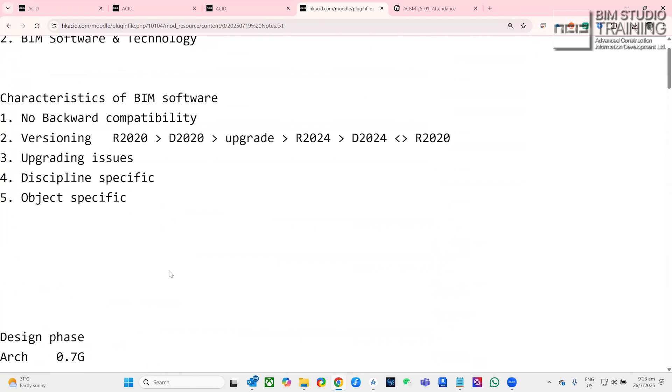So last time we mentioned about the characteristics of the BIM software. Let me just make a copy of this. We haven't finished yet on this part. So we mentioned about BIM software, we do not have the backward compatibilities. We have issues on the versioning, we have the issue on the upgrading issues, and then it is object specific and also discipline specific, right? Now, these are some of the characteristics of the BIM software.

Now we keep on emphasizing the fact that you, as a BIM manager, how you manage the process. When we talk about stakeholders around, a lot of people in a project, in the design phase, in the construction phase, in the operation phase, they all have to use softwares dealing with digital information. So the role of BIM manager is actually to facilitate the whole BIM process. How do you treat the digital information?

How can you ensure the digital information is correct? Done by whom? Has it been checked by someone else? Are the digital information in accordance to the standard that's specified? All right, so that is the role of the BIM manager.

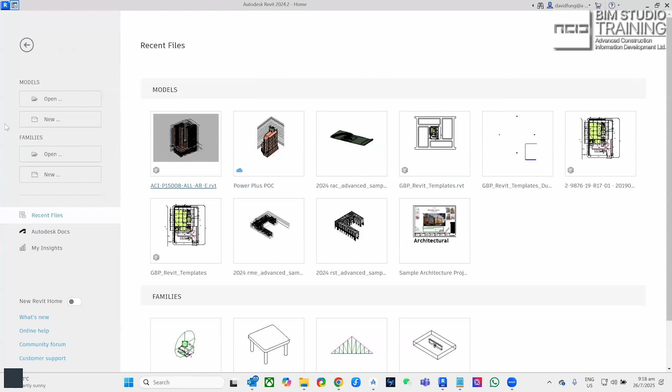Now if you are okay with this, you can open up the file - open triangle. Don't open, open the triangle here, the triangle sample projects. Open up the RAC 2024 RAC advanced sample project. Let's continue looking at this software.

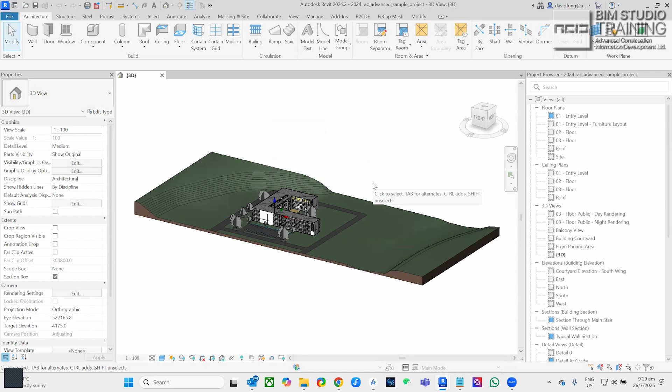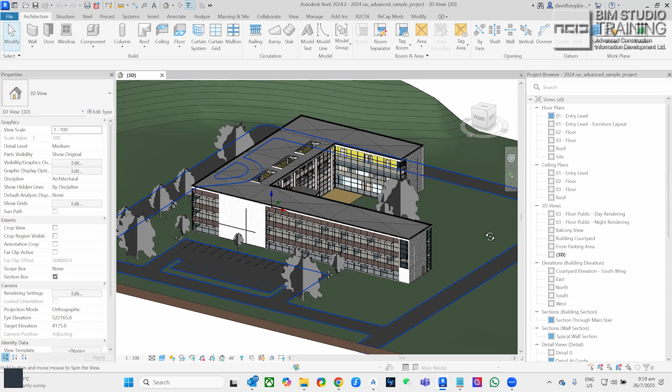All right, you open this file. Now, this is of course an architectural file here. Can you scroll to the bottom? Did I ask you to flip and look at the bottom before? Yeah, you're already right, okay. Now if you look at it, it's a simple building, a simple project in here.

On the right hand side or your left hand side, doesn't matter. Under project browser, now you can see the English names: floor plan, ceiling plan, 3D views, elevation, sections, rendering, drafting view, walkthrough. Walkthrough in Hong Kong we call it animations, all right? Animations.

Area plan - so do you know what is area plan? What's it for? No, it's not only top view. Top view is plan. Room area, you can get it from the floor plan. This is not about room size.

This is for GFA calculation - general for the architects, we calculate the area, not the room size, but all the overall area. All the mathematical calculations is under here, area plans. So the consultant and architects need to use this, not contractor, but architect definitely needs to use this area plan.

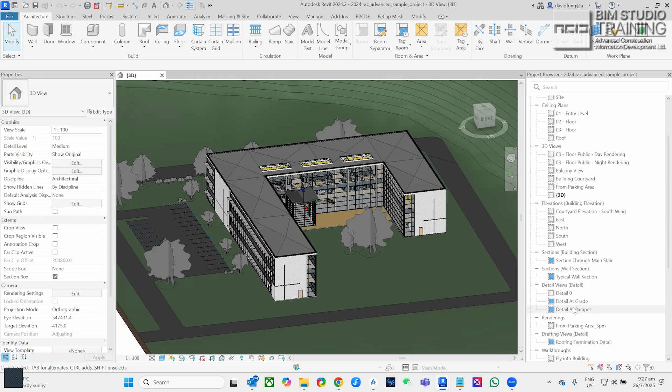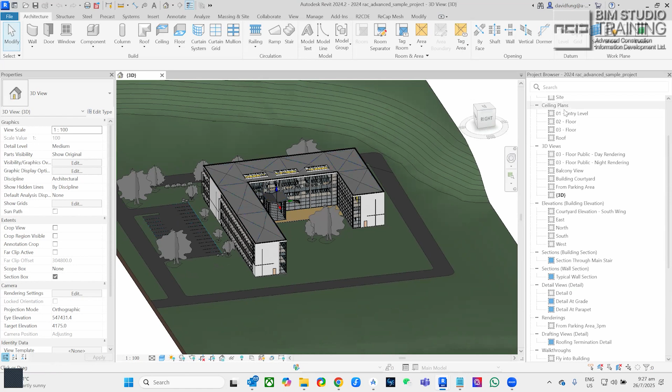Okay, let me explain a little bit more first. Now, this is a 3D view. I would like you to open three views. One is this one here, the second one is the ground floor plan, the third one is the east elevation. Can you open these three?

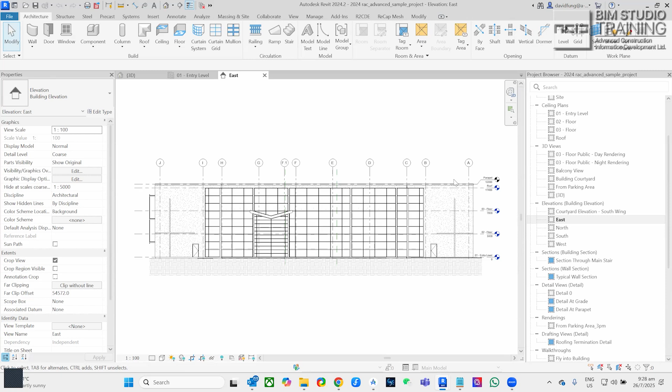If you open these three, and you want to see all at the same time, you want to lay them out on the same screen, just like a tile, kitchen tile. So you make your window as a tile. Window tile, WT. You press the keyboard, WT. So it automatically arranges for you, WT. Now, if you want to go back to any particular view because it's too small, you do the reverse, TW. So WT, TW.

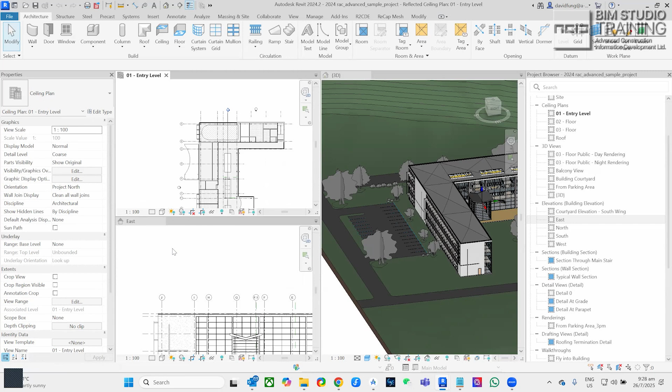Now, if you look at this, in BIM, we look at things from a different perspective. Oh, I opened it wrong, not a ceiling plan, should be floor plan. Floor plan, okay.

Now, I tell you a story. I started my BIM journey in 1998, when I was working in Australia. I'm using BIM there, not Revit, but another software. Do you know that during those days working in Australia, I needed to sign a special paper with the company, a special agreement. Why? The statement says...

It is David's own intention, his own decision to set his monitor to this size, I mean subdivided into small things. Should anything happen to David's eyesight, it is his own problem, it's not because the company asked him to do so.

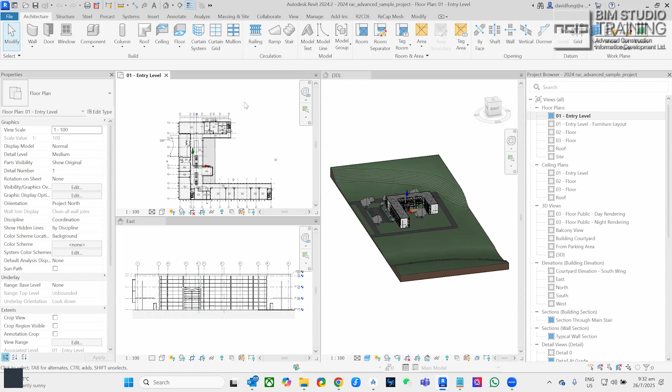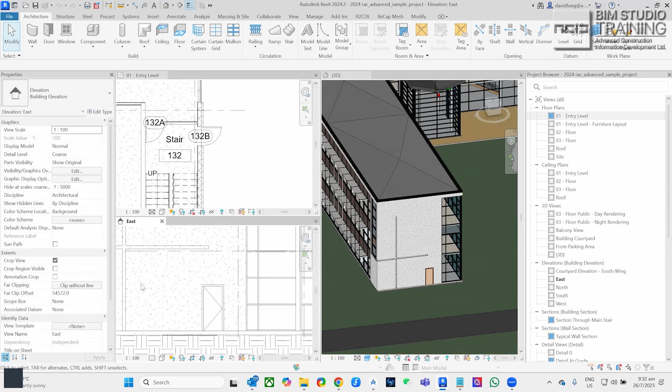Now, having said that, I would like you to go to the floor plan. I want you to zoom in on the floor plan, there's a door here. By the same token, if you zoom in here, and on the east elevation, zoom in here. Now you are looking at a door at this wing, and then this is the door, this is the door.

Now, if I'm talking from a designer or a contractor's point of view, if these drawings were prepared by CAD, for example, does it mean this is one CAD file, this is another CAD file, this is another CAD file? We do change things. Architect, designer, we change design every day. Contractor may change as well.

So if this is in CAD, and I change the position of the door, if I shift it here, what do I need to change? Change it 1, 2, 3 times, plus maybe the door schedule 4 times. So we are doing it 4 times, same thing 4 times. That's why we are the most unproductive industry in the world, because we keep doing the same thing many times.

Now if you do that in the BIM software, if you highlight this door, for example, and I move this door, now the door becomes an arrow. If I move the door to this position, try to do that, and tell me what happened.

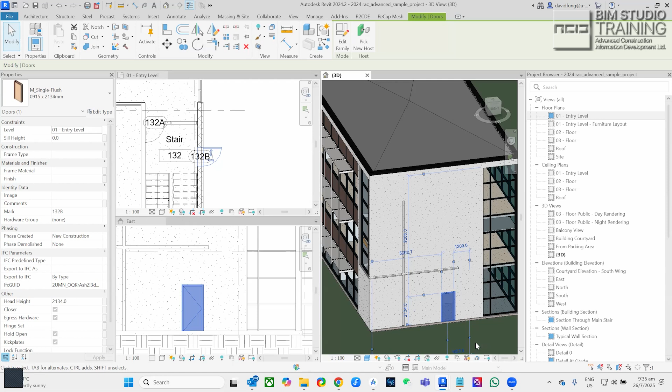So we draw and draw. I cannot imagine why people are still using CAD, then they keep doing the same thing many times. We keep changing, and they have to redo everything again. So we have a name for it - this is called single source of truth, SSOT.

So this is a characteristic of BIM software: it is a single source of truth. I'm not sure whether you've heard about this, but basically all the government people now are very much into this idea. It needs to be a single source. So the plan, the section, the elevation, the schedule - you change it anywhere, and it changes everywhere. We call it single source of truth.

In fact, this is not a word that I created. If you look at the technical circular, you see that? So BIM can be served as single source of truth. There will be only one single source - one for design, then pass one during construction, and then later for the operation. So this is one model, and the model is a single source of truth. Now, this is a keyword. You may be asked, what is the characteristic of BIM? So one of the typical answers is a single source of truth, because we put everything in that model.

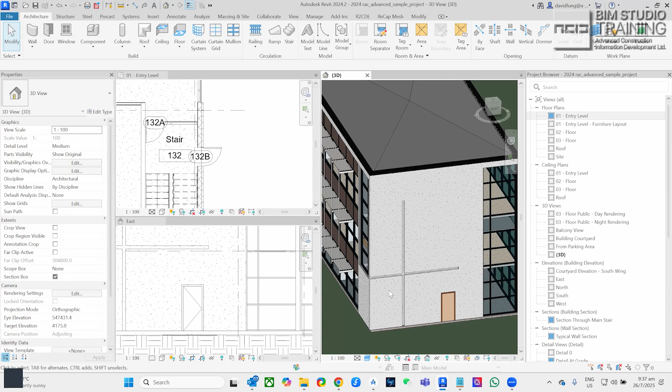Now, it does have a lot of implications. That means we have different groups of people - a group of designers, a group of contractors and subcontractors. So that means every single body works on their own discipline. Architect works on their own discipline, structural engineer on their own discipline, contractor, MEP or plastering or steelwork. So they produce their own discipline model, and that is their single source of truth. Now, when everybody puts them in, they combine them into a consolidated model.

Now, if you look at this, this is the model, and because it's a single source of truth, what is a plan? A plan is a horizontal cut of the model, looking down. What is a ceiling plan? It's a horizontal cut of the model, looking up. What is a section? A vertical cut. What is an elevation? A vertical cut of the model, but not cutting the model - that's the elevation. What's the 3D? 3D is this one here.

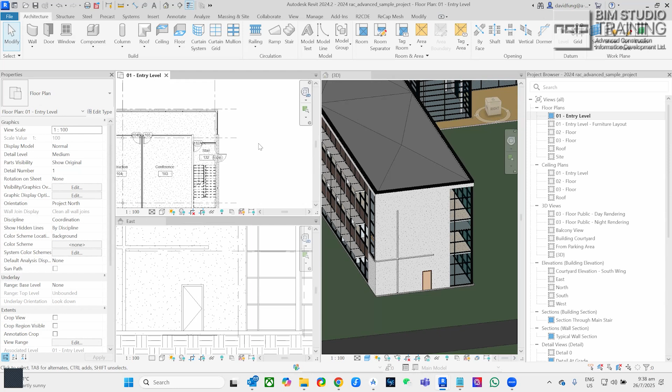So basically what it means is every single view comes from the model. So we are creating a relationship - it is from model to view. So views means the plan view, section, elevation views, section views. I'll come to schedule later. So these are the views.

We do not draw anymore. I told you, as an architect, I haven't used AutoCAD for the last 24 years. I do not need to use AutoCAD for the last 24 years. But it doesn't mean I do not have drawings - it only means the drawing has to be produced from the BIM. So plan, elevation, section. Think about this - there will be no CAD people anymore. Is there any CAD people here? Imagine there will be no CAD people anymore in your company, in the industry, in your project. There will only be someone who builds a model, and then the model will be cut into different views.

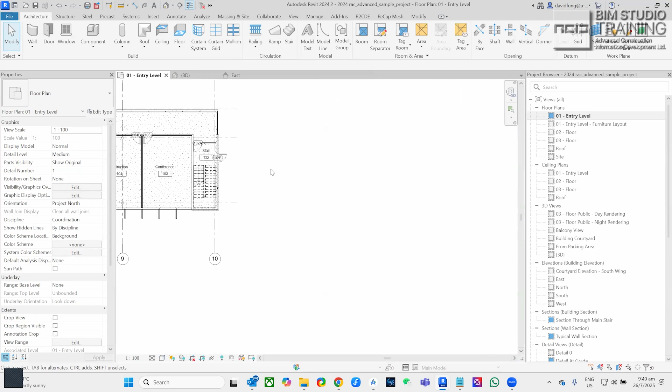Now, are these drawings? Are these drawings? Let's take a look. Say, for example, if I go back to floor plan, just a few clicks - now can you tell me, if I want to cut a section through here using CAD, how long will that take a draftsman to cut me a section through 3 stories? How long will that take? 2 hours? 1 hour, can you? 1 hour cannot - 2 hours already very few. Normally I think it may take 3 hours, maybe half a day. Okay, something like that. If someone tells you it takes 2 days, you can fire him, right?

Now if I want to cut a section through here using a BIM software, as I said, because we already have a model, this is a horizontal cut of the model. You can go to the icon next to the house - there's a section mark here. You click on the section mark, and here, detailed section - we don't want detailed section, we want building sections. Go to floor plan, go to section mark, and select the building section. Now the building section - one click here, and another click there. All right, 2 clicks, and then you create a section mark with a line in between. So this is the same as your CAD operation - just draw where you want to have the section. Now in CAD, the draftsman will need to spend 2-3 hours to draw this up. But now you are the one creating the section. Once you create this, right click, and go to view.

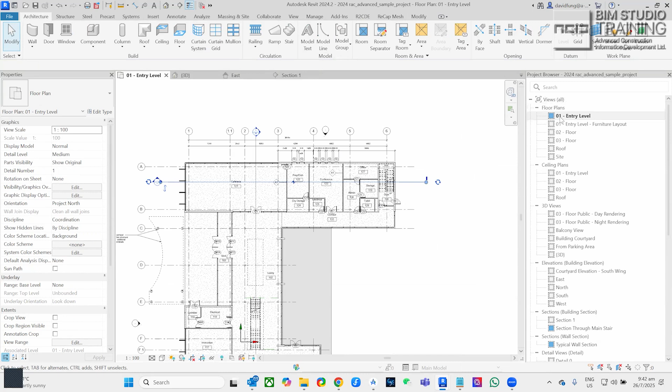Click the command, but make sure you use the building section. If not, click here to see the building section. Then start and end, just like drawing in CAD, just a symbol. After you've drawn the symbol, right click, go to view, and it already has the section.

How much time? One second. Five seconds, right? So you can do 1,000 sections, easy. I never draw anymore. Using CAD is a waste of time.

It will take longer upfront, yes definitely. But this is not building a model, this is part of design. It's a design decision. So it integrates, there's no drafting. It is design and production of drawing at the same time. Yes, it takes longer upfront, but the rest, you do not need to go again.

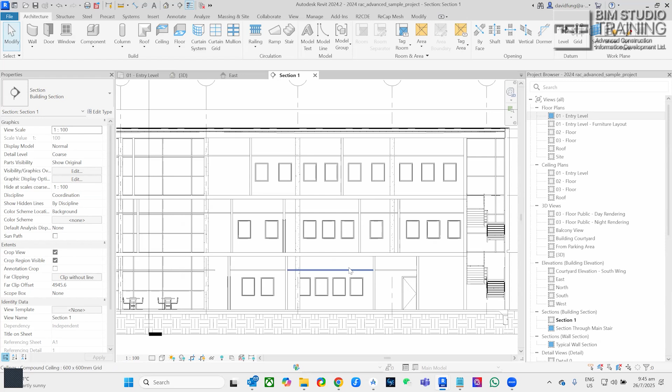It is a model, but we want to draw - I want a drawing of the section, right? Okay, this is not a drawing yet. What is missing? No title block, yes, and this is only graphics, a lot of annotation, dimension, that kind of thing, right? So the draftsman needs to find out what is this room, what is it called, what's the level, what's the door mark, window mark, that kind of annotation. So that's why he needs 2-3 hours to complete this.

Now this is only graphics. Go to annotate. If you want to add some annotation there, you can see there's a command called text, right? See this? Never use it.

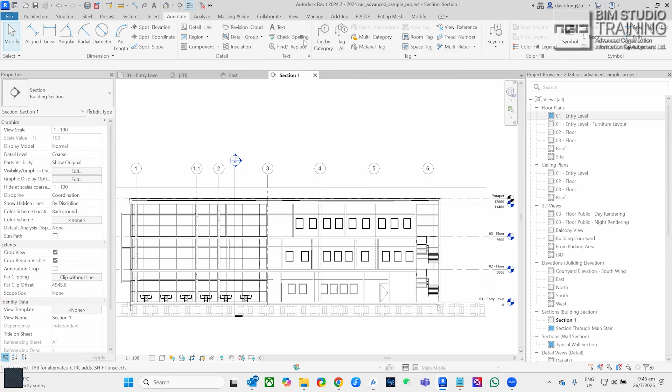Because in CAD, the text has no meaning. Don't use it, we are doing BIM. We are doing information, we are not making text. Never use text, so we are not talking about text. We are using TAG. Tag is information. So I want to tag all.

Tag all, okay, what information do I need? I want the room tag, the door tag, the room tag, the wall tag, the window tag. The room tag here, I want the room tag with area. Now these are information, these are not text. So I wanted the room tag with area, all right, see like that?

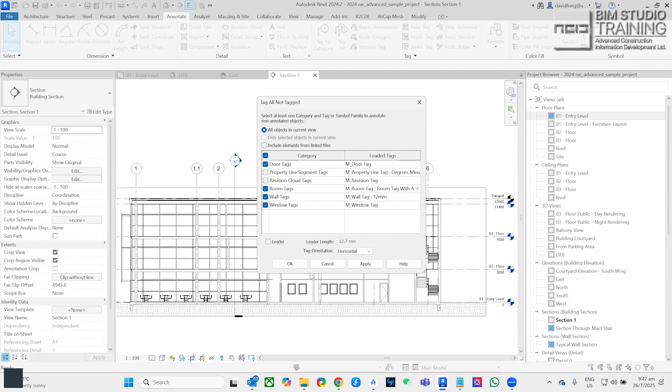I want the information on the door, the information on the room, information on the wall, information on the window. Okay, and how long did it take? Done. Why spend time in CAD to draw it? And you won't get it wrong. Well, hang on, as an architect, is it really that case? Cannot be that, 15, right?

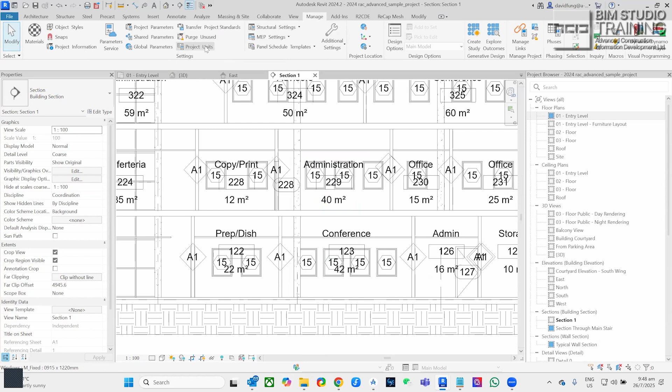Because this one has not been set up properly. Now you only need to set up properly once. So you manage its project unit. So the unit is not right at the moment. I manage the project unit because the area - you see there's no decimal. You click on this. In Hong Kong, we use 3 decimals for the area. So now it's set with 0, so 3 decimal places for the whole project. Okay, and it's done.

You don't need to measure. How do you automate this so they overlap in Revit? You cannot, but you can go to the shopping cart and buy a $10 plugin. Someone else can do it automatically. Yes, you can - it's time, it's money. App Store, you click on this, this is the App Store, Revit App Store.

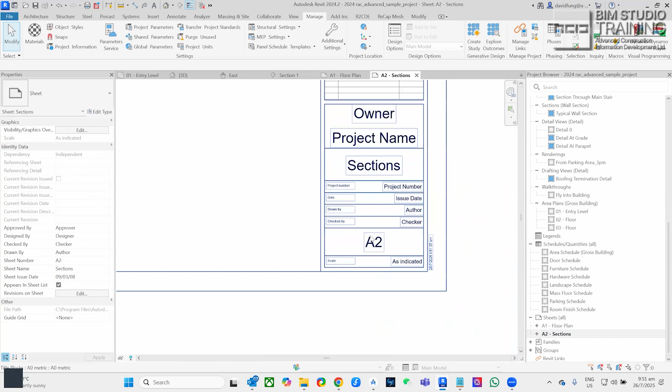Now, I guess your drawing name will not be like this, right? If I double click on this, say this is project 1, 2, 3, 4. This is architect, this is tender drawings, this is plan on plan, 2, 3, 4 slash 023 - a very long thing. Say something like this, doesn't matter the system.

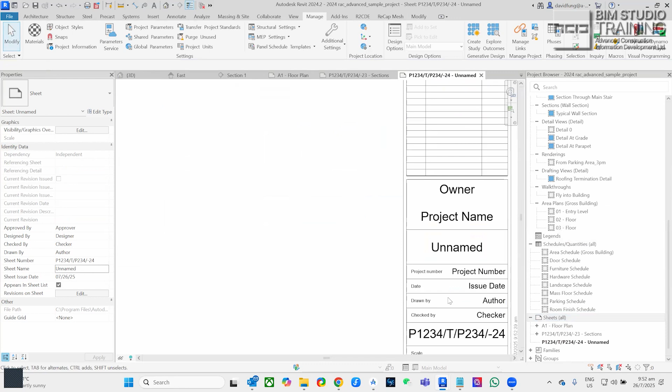All right, say I got this, which is a section on this one here. Now I just created a new section. I want to create a new sheet to put in there. So in the sheet here, right click, new sheets, create a new sheet - A1 - and you see there, it's 24.

So it's all automatic. You mean if you insert a new text, the text inside the form automatically updates, right? Yes, the numbering - automatic. So it was 23, now it becomes 24. If I keep on increasing, 25, 26.

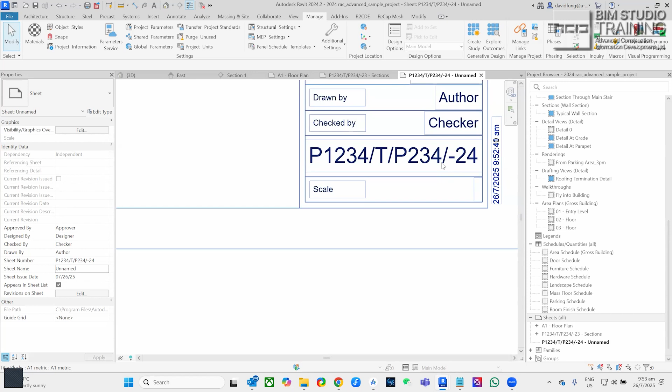All right, it's empty. Now the one I just created is here under section. Under section I created, I called it section 1. Now this is section 1, right? This is something I just created.

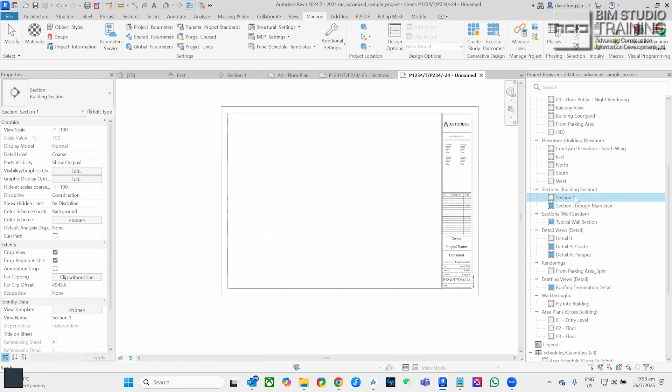All right, now on the new sheet - this is the one I created. So what do I need to do? Drag and drop.

And this is drawing - I do not draw anything. As an architect, I don't draw. I want to design, I want to have a better design - that's all it is, I don't want to draw. And you don't need to draw. I don't understand why all these architectural firms in Hong Kong keep using CAD and draw and draw and draw - just a waste of time. Okay, we don't draw.

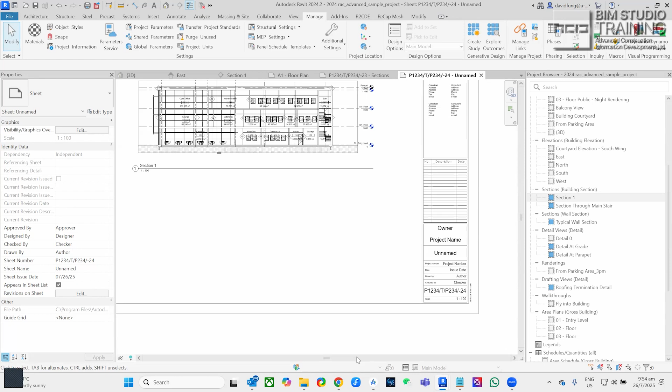So this is the way we create sheets. Now that's why from model, we create the views and it creates sheets. Remember the policy - we said all plans are now mandatory to be generated from the model to the sheet. So the policy is mandatory, now all drawings must come from the model. So now you can see the characteristic of the BIM software - we can generate sheets.

Now this is the proper way of doing things. As a BIM manager, you have to ensure that happens. Now especially, okay, to be frank, I know your company - I've worked with the company. I know your company is somewhat this way.

I have to say, I don't agree with the way you guys work. So you have somebody build a model, you export it as CAD and use CAD to issue drawings. To me, it's wrong. You're not using CAD, you're not using BIM for the whole process - you're just doing the model. That means any further changes, you have to go back again. I personally do not agree with the workflow of the company.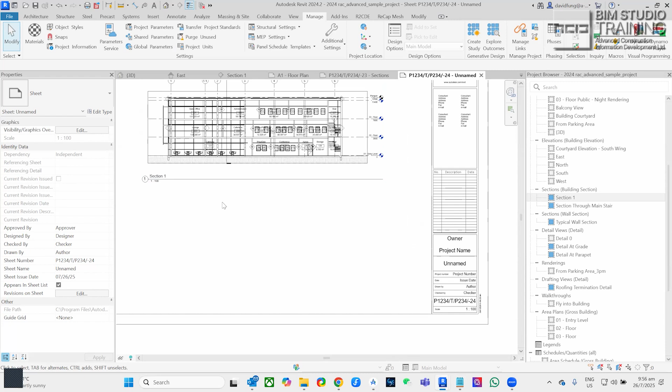I cut this section, right? Where is this section cut from? From plan - this plan, right? Look, this plan, right? I cut this section, correct? Cut from here. So in this sheet, what happened here?

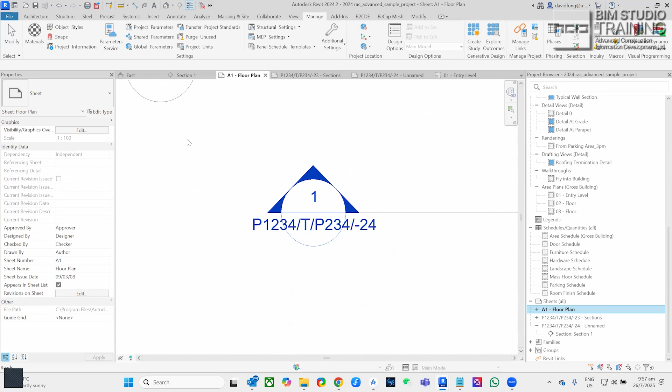It is automatic. Why would we spend time to check it? I never check, I don't need to check. If you're doing CAD, then you have to check again - it's a waste of time. In plan, the section is already updated, in here. So all these, they're correlated - they're all related. No drafting, you don't need a draft.

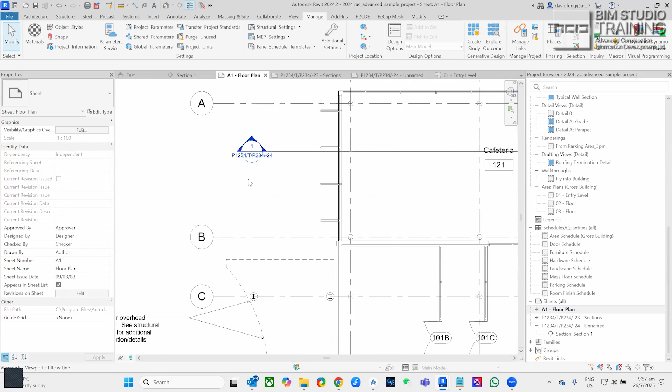So it is information, they're related information. Now the thing is, as I said, we keep on changing things. Now if I look at the floor plan again, let me ask the architectural background.

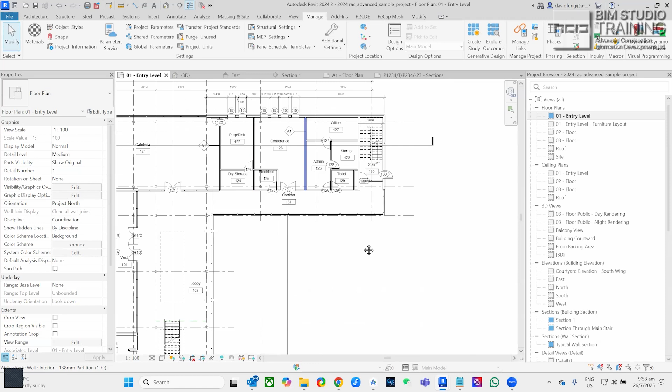By the way, you can do this with me as well. Now, this number, drawing room name, room number, what are the areas of each? Can you click one of them, right click, and select all?

Select all. In the entire project, you select all of them, all become blue. And then all of them must come with area.

Do you guys know? Architects will know. How do architects do the area? Polyline, use polyline, measure it, then get a text and type in the area. Then when you change, you have to go again and change again. Waste of time. We are doing the most unproductive industry in the world.

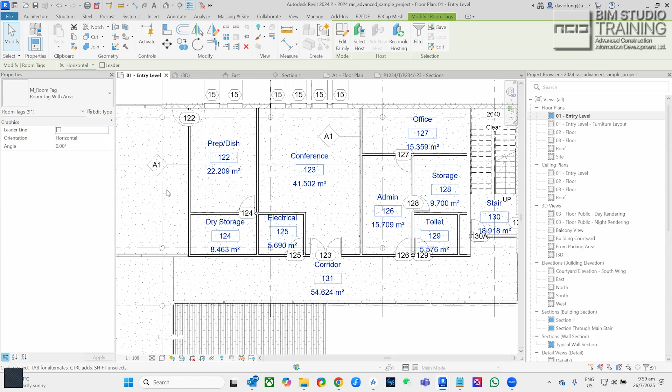This has been around for 30 years, all automatic. We don't change, we don't need to do it for the last 30, 40 years. But how come architects are stupid enough to keep on doing this stupid thing?

Now the thing is, we keep on changing, right? Now this is a cafeteria here, a preparation room here, a dry store here. So they have the area. What happens if I have a design change? I move the wall, change it here. What will change? This area will change, this area will change, that will change.

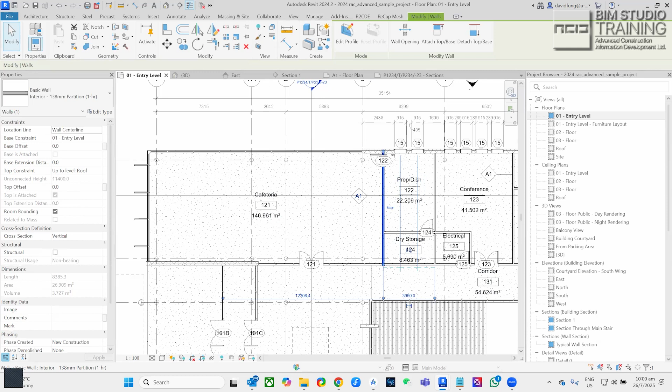So in AutoCAD, you have to repetitively do the changes many times. Now, I select this wall, change the design, left, left, left, left, left. You see, look at the figures? It changes automatically. This is BIM.

Now, if I change this automatically, what happens to my section? So this is 135, right? This 135. So you go to my section. It's 135.

So it doesn't matter where you do it, it is the same model everywhere. So plan, section, elevation, any view, they're not separate. You do not need to recreate everything again. You just have the model and you have everything. So this is SSOT. The key of BIM is SSOT, single source of truth.

Why do you have a model now? You have CAD too. It is even more stupid than only having CAD. Why? Are you doubling up your work? Previously you have CAD. Now you have CAD, and you have BIM. Is it double up? Is it double up?

No, you're tripling. You're doing CAD, you're doing BIM, and you have to ensure they synchronize, they keep on updating. You're tripling your effort. It's the most stupid workflow.

All right, you better not use BIM then. If you're using BIM, the drawing production is part of the process. You're not using BIM as a model, doing CAD, and then coordinating again. It's most stupid.

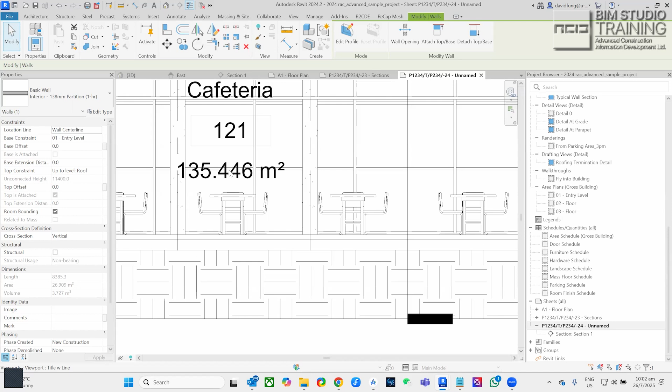So the drawing should come from BIM, not from CAD. All right, so all of these changes are automatic. Okay, so very quickly, I don't want to spend too much time on these technical stuff. Now, I ask you because I know you're an architect.

So this drawing here, are you happy with this? No. Okay, I want to color it, make it color, make it easier to see. So how do we make a color? If this is AutoCAD, how do we do it? In AutoCAD, you make a polyline around the walls, and then you make a hatch and you change the color.

Right? Okay, now you have a design change. Then you go back to the polyline and change the color again. All right, this kind of thing.

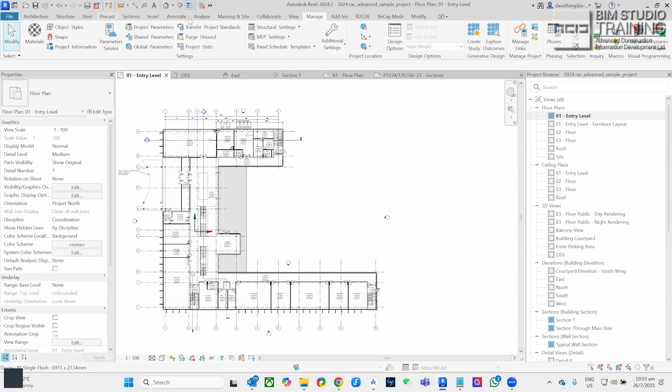Okay, now I'm using annotate. I want to color fill it. Color fill with legend, so I want a color legend. So I put it here.

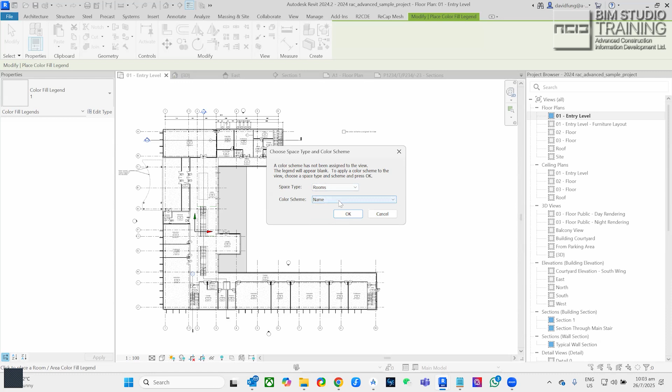Information. What information? What if, and if, then. If it is a room, if this is a storeroom, then it is this color. If this is a classroom, then it is that color. If then, based on information. So based on room name, if a room has a certain name, then it gets a certain color.

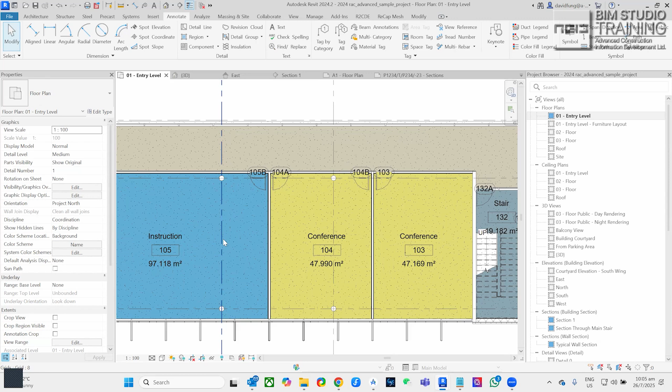Now, okay, the thing is, I keep on changing, right? As I said. So, okay, let me do this. If I put it this way, WT. Okay, I have my plan, I have my section. This section is not color, but the same thing.

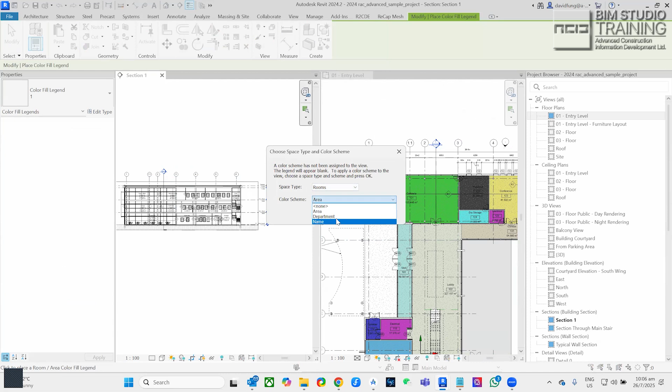Annotate, color fill legend in here. Based on information, if a certain room, then a certain color. Okay, it's automatic, and it's tally.

I keep on changing my design. Change my design, I move my wall. Look at the color. Isn't it should be like this? It should be like this, right? I change the design. That's smaller, that's smaller, that bigger, that bigger. That color changes automatically.

SSOT, single source of truth. All right, so that's a characteristic of BIM software, single source of truth. You work on a model, then you change it everywhere.

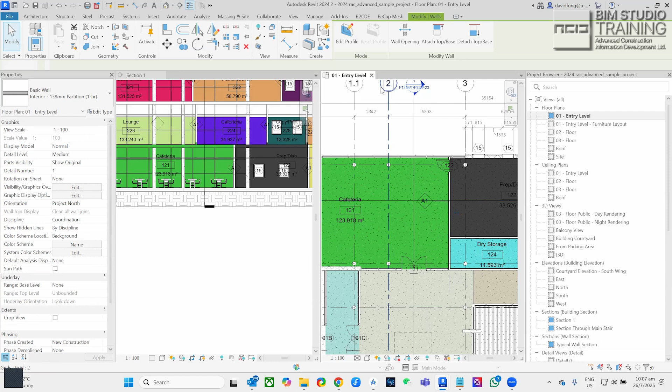We don't mix it with BIM and CAD. No need, and it still wastes more time. Does it make sense to you? Not quite, not quite.

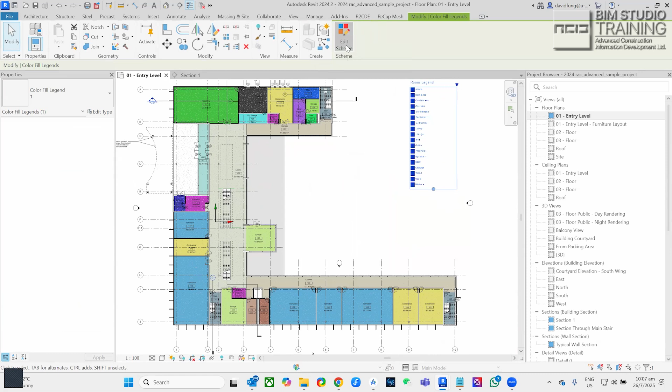If I have every room different name, different color, it is close to meaningless. What about this one? I edit color scheme, so it is every single name a different color. I don't like that. How about based on the area? If this area, this color, this area, this color, and I click OK, that is more meaningful.

A different color scheme, it's a range. You can make up your own rules. So the way it's presented is just a result of rules. The rules are based on information. So room name is information, area is information.

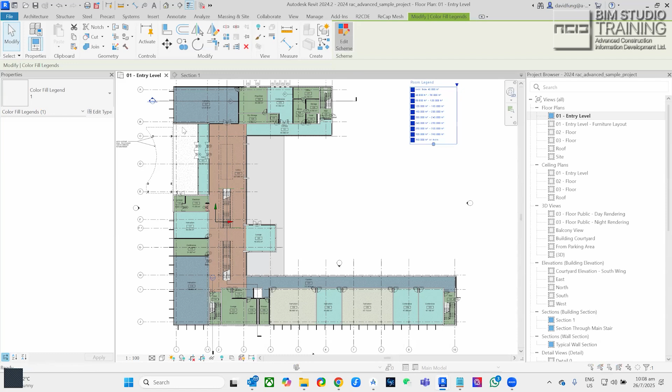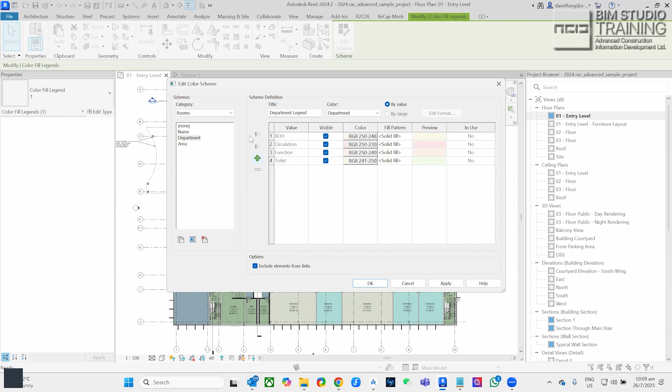Okay, in fact, if I'm an architect, this is still not good enough. I will actually use department. So the department, okay, this is quite meaningless. Okay, so I have the circulation as one department. I have a function room as a department. I have a back of house as a department. I have toilet as a department. So these are based on the room department.

Okay, so everything is white now. Why? Because I've not defined it. So if this one here, the department information, this one is a function room, so this color. This one is back of house. The department back of house is this color.

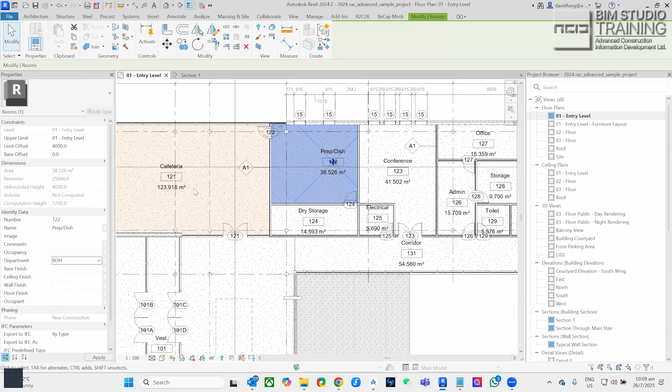So all this can be automated, depends on what you define. So it's an if-then relationship. It's based on the information. Now, the way

we present the information now is whatever we want, we draw it. Whatever we want, we draw it. It is all human interference, we want to draw this one. BIM, you need to change your mindset. You change your mindset, you use information. What information? If this information, then what will it look like? It's a rule and then presentation. Rule, presentation, rule, presentation. It applies to design, construction, everything, everywhere.

BIM is talking about information, how we play around with information. The look is a result of it. CAD has no logic, you just would like this color, you draw it. You'd like to show this, you draw it. No logic. BIM, very logical, make use of information.

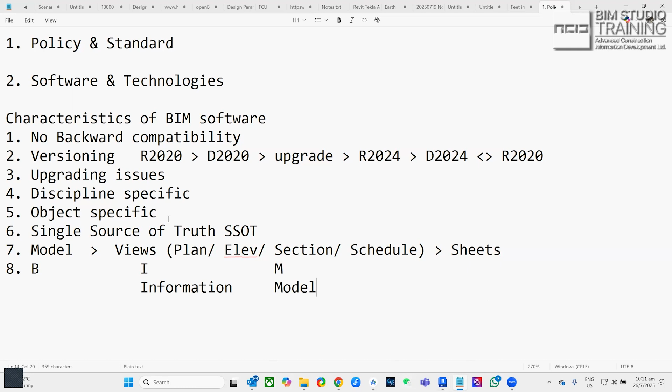Okay, I won't go into too much detail on the technical side. Now, when we say BIM, as I told you before, it is an information model. It's not a geometry model, it's an information model. It's object specific, so the information is about that object.

That's why if you look at this, you click on a door. These are the information. This is the geometry, the M. This is the information, the I. The I and M together make the information model. AutoCAD, 3ds Max, you have the geometry, but no information.

In CAD they have line weight, line type, that's not related to reality. But in BIM, everything is related to reality. For example, you have all these finishes, frame material. These are the information about the door.

This side is called the instance parameter. Instance means this unique object has this information. But in this project, how many doors are there? How many types of doors? How many of that type? I have double door, single door, timber door, metal doors - they're classified differently. This is a timber door of this dimension, but there are same doors somewhere else on the project. Where are they? How many of them?

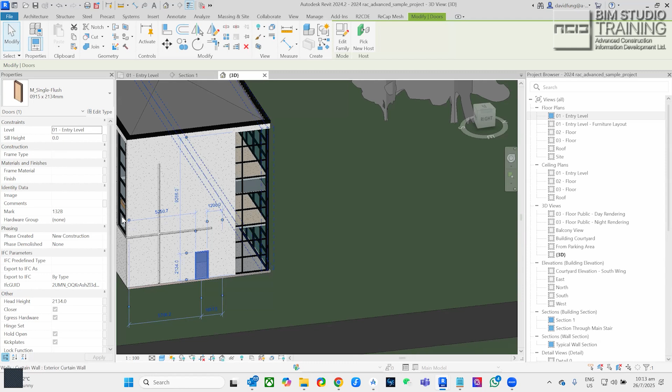So if you edit the type, you have more information. Now this is type information, this is instance information. You have two names - this is for type, you don't have the instance. Instance means unique - one object will have instance information and type information.

The difference is, whenever you change here, it affects that door. When you change here, it affects all the type. You may have 200 doors in this project - whenever you change here, you affect all 200. So instance information, type information - two levels, instance and type. It applies to every object, everything. It has a hierarchy.

So it must have an information model. Imagine if you click on something and it's all empty - that's no use. Or if you click on this and you have different unrelated information, then you got wrong information.

What did I ask you last time? What is missing in MEP? Trunking - people use ducts to pretend to be trunking. When you click on that, what information do you get? The trunking information. Where's the electrical information? None. So people only look at the M, they don't care about the I. To me, it's wrong, because the I is even more important than the M. It looks the same, but if you've got wrong information, then you got a problem.

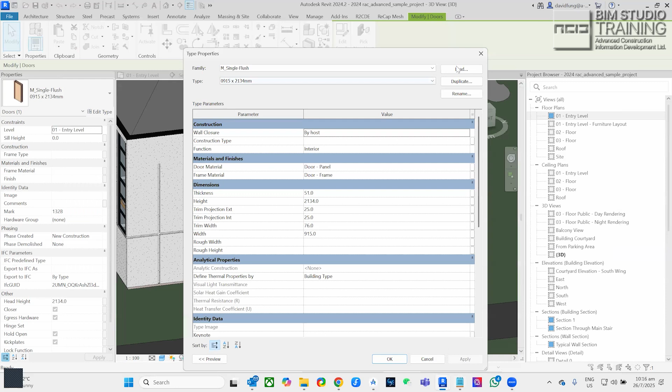So you can click on - now this is about the door. What about the tree? Does a tree have information? If you look at the tree, it also has information - what species, how tall, what age. These are the information for the landscape architect, for the one who planted the tree.

So you click on every object, it has its own information. CAD is only line weight, line type, color, length - no information related to reality. So BIM is object specific, and every object has its own type of information - type information, instance information, instance parameter, type parameter.

Now think about this - can you deliver this message to every one of your subcontractors? Then they build their own object with all the correct information. Can you do that? Well, you have to.

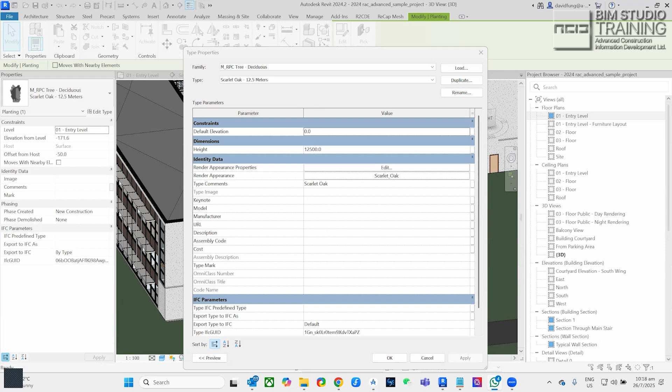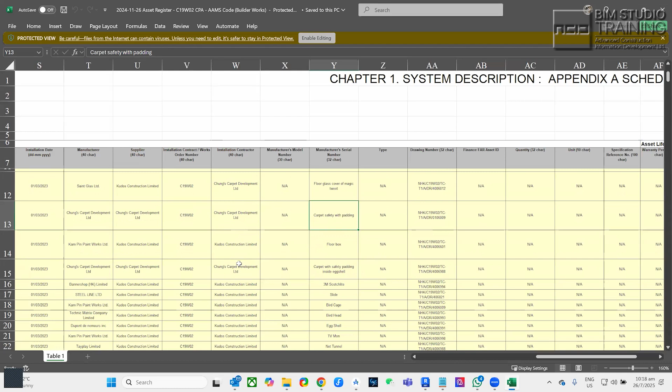Let me show you. If I can, I'll show you a real project. This is something I just received yesterday - this is the airport project.

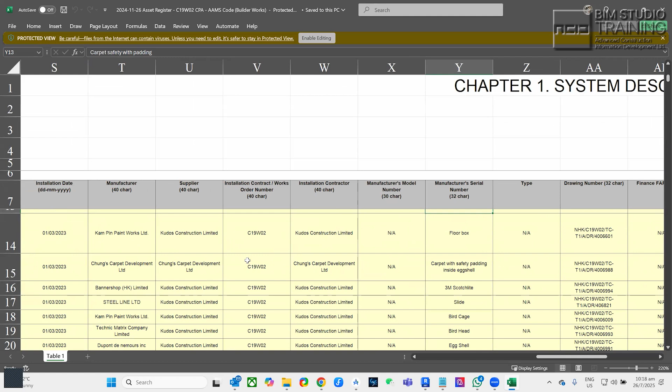So look at it from the client's point of view - this is a BIM project. Drawing number. Now look at this - manufacturer serial number. A floor box is done by a certain subcontractor, definitely. So we've got a designer, a main contractor, a subcontractor. Now the client said, I need this information.

These are the information in Revit. I need these to be filled in with this. So think about this floor - who caters for the floor box, who caters for the carpet, who for the size. For the client, they are expecting the main contractor and subcontractor using BIM to provide the correct information. This is what they need.

So you are acting as a main contractor. If you are working as a BIM manager for the main contractor, you have to somehow make your subcontractors use BIM and give all this information in the model, because this is the deliverable. They need to extract information from the model. This is the submission to the client.

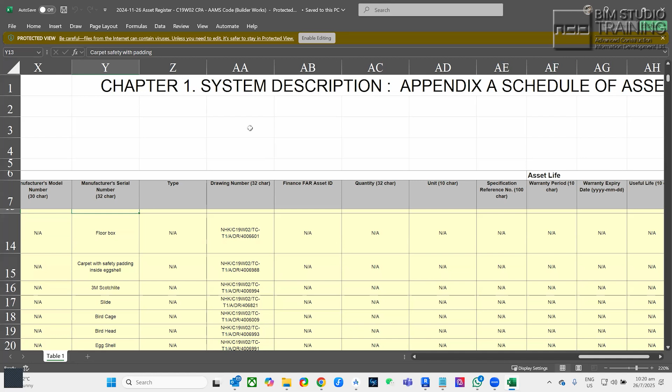So this is not text, these are information from the model, contributed by all the suppliers, all the subcontractors. All right, got that?

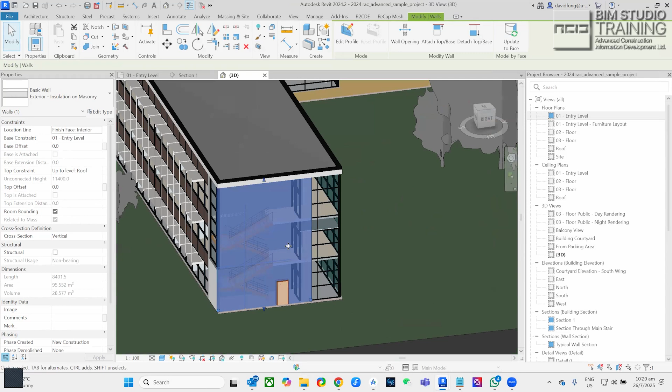Now my point is, every object is project specific. They're all objects, and every single one has its own information, and information is more than model. Okay, now you accept that.

Next question: how many doors are there? Is it 50, 60, 100, 200? How many types of door are there? How many types of wall? What's the volume of the concrete? How many types of trees?

Now as a main contractor, you need to subcontract. You need to find the landscape people, you need to find the concreter, you need to find the door manufacturer. Right? So they need to produce, they need to manufacture that.

Who does these calculations? QS. Yes, we don't care, we give them drawings. All right, I don't care. Okay, now, yes, QS.

The changes, you have VO, you have changes. So the QS needs to compare what was in the contract, in the tender, to what's in the change. So the difference is a variation, so whatever claim or whatever VO, okay, that's awesome.

Number one, is this not a BIM project? Number two, is it efficient? How did the QS do it right now? What's the workflow of the QS? How does the QS do the counting? How does the QS do the comparison? How?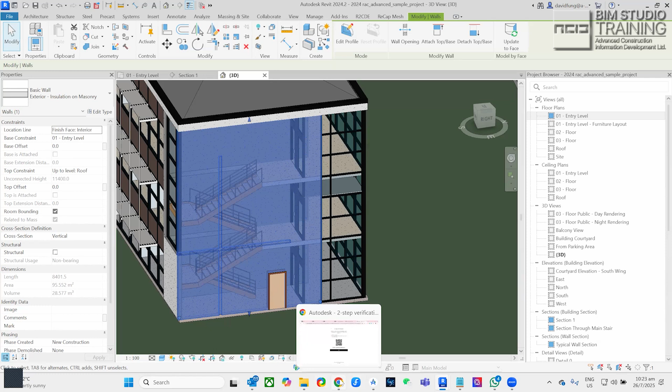BIM, we are talking about digital information, and it is also required for cost estimation, mandatory in design and in construction. That means the QS needs to count numbers using the BIM model. How?

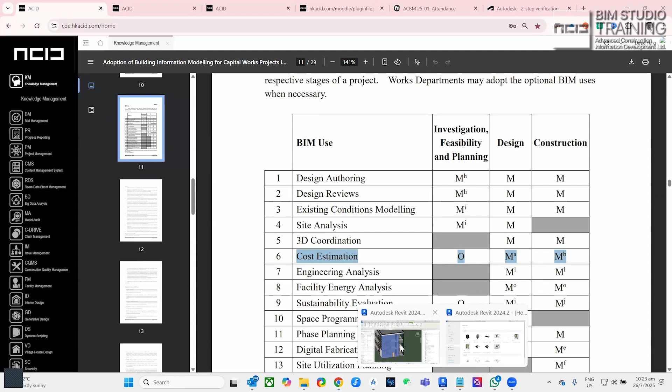Now, I just described the yellow highlighter, red highlighter — this is a manual way of looking at the drawing. But now you've got a model. How? Scheduling. Yeah, this is my next point, a very important point.

In here, there's one and only one way in Revit and in most of the software, we call it scheduling. Okay, so I would like you to help me do this together. So may I ask, how many doors are there? How many types of doors are there? How many doors in one type of door? What is the total number of doors? So these are the information that we need to count.

We need to produce, okay. Now, if you overcount, you count more, then you pay more, and then they become repeated, you don't install it on site. You count less, even worse — you count less, you order that, and on site you've got 10 missing. And then you make another order, it will take you another 6 months, and then you affect your progress. All right, so accuracy is very important, and the information contained in the drawing or model.

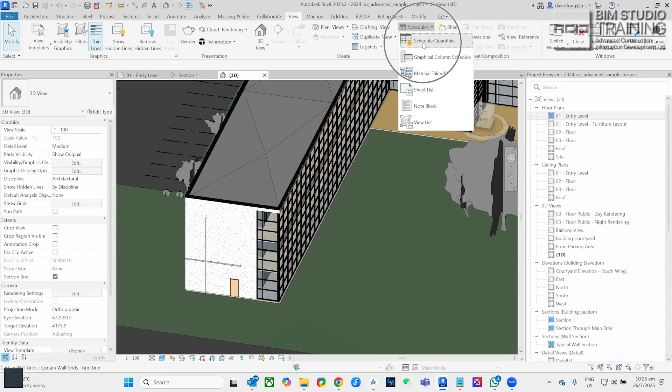Okay, now let's do a very quick understanding of how BIM works, so we call it scheduling. Okay, now say I take an example of the door. So the command is View, under View, Schedule. Click on View Schedule, Schedules/Quantities. Okay, click on this.

And then you look at this, so it has architectural, structural, MEP objects — these are all the objects. We do doors, we can do doors, you can see the door. You can count the cable tray, count the ceiling, count the columns, conduit, whatever you name it. So all the objects in the model can be counted automatically.

But first of all, you need to understand what they are. What's casework? What's this? What's casework? So this is strange English or American English. What's that? What's casework?

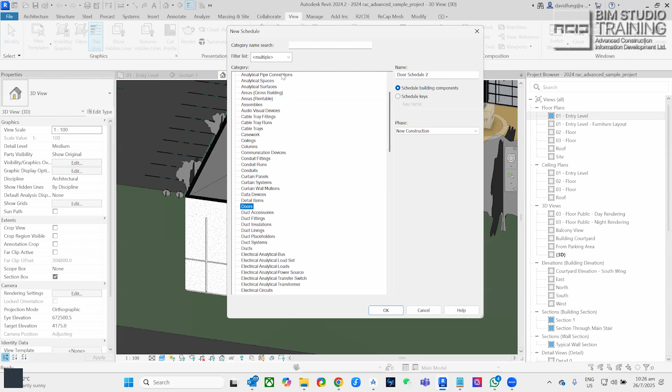So go to door. You can see available fields. In the door, you have all these different information about the door, which you can use. So what sort of information do you want to know? Cost, okay, but before cost, you need to count the type and the number, that kind of thing.

The first thing I want to know, where are they? So they are in levels. Which level? I got 3 levels: ground, first, second. How many on the ground floor, how many on the first floor? I want to know what sort of door they are. Are they single swing, double swing? So it's called family and type.

I want to know how many of them, so count. I want to know the height, the width, and the thickness. So these are the geometry. I probably want to know the material: frame material, frame type, door leaf material, leaf type.

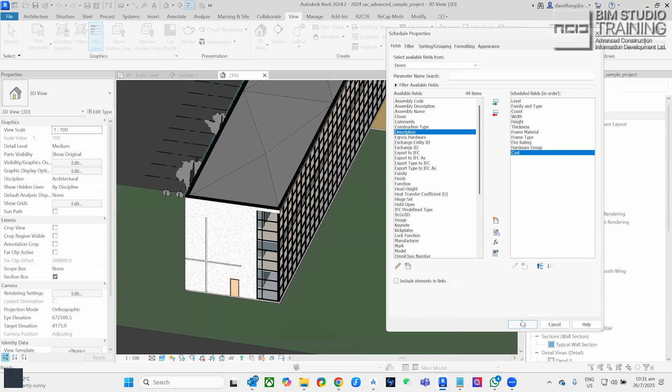It took me 4.5 days. My life - 4.5 days wasted for nothing. So from there onwards, I decided I'm not going to do door schedules manually anymore. Don't waste my time. So that's why here, how long will it take to do this door schedule? Click OK - it takes 1 second, not 4.5 days.

So we are extracting the information. Now this is not Excel - this is a different way of looking at the model, which we call a schedule. It's also a view, which means not only plan, elevation, etc., but schedule views too. All these schedules come from the model. So the model creates views, and the views can later be put onto a sheet.

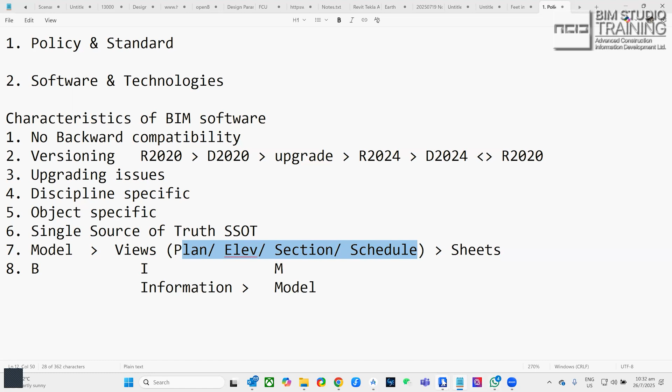So I am just using the door as an example. That means you can schedule the concrete, the ironmongery, anything, if that thing is already in your model. You can schedule it out. So the model can produce drawing, and the model can produce quantity.

Okay, quantity. How do I know quantity? So what do we have in here? We have an Excel-like thing, with headings like level, family, type. Now if you look at the family type, it is unorganized, unstructured, quite messy. You have this single flush 20 minutes by rating, which this one, which this one, and then which one here. It is unorganized, very hard to use.

So this unstructured information, we need to structure it. What do we want? We want to know how many doors, how many types of doors, how many doors in each type. And we want to know the total number of doors, so we can instruct the subcontractor to construct it. This is the work of the QS.

Now, as a BIM manager, I'll show you the workflow. As a BIM manager, you need to ensure the quality of the model, good enough so you can produce meaningful deliverables for people to work on. From this schedule, you can see several commands on edit. It doesn't matter which order, there are five edit tabs. If you click on whatever, you see these 5 tabs: 1, 2, 3, 4, 5. The first one is the one you already looked at.

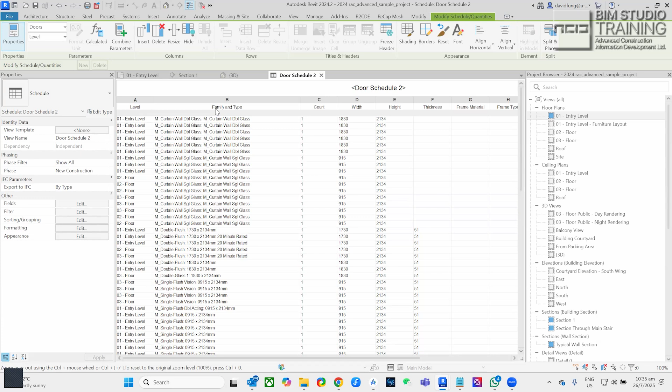So if you go back to here, the third one, untick the itemize, untick the itemize, and OK. So I got these types, and each type is numbered. So 63 of this type. This helps me a lot.

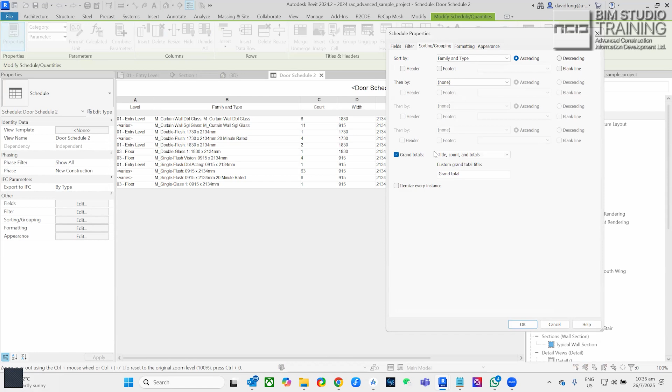What's the total number? What's the total? Don't use your calculator, you don't need to. Now, because you have not asked it to do the calculation for you, go back to sorting, because we didn't tick grand total. But which one to get grand total on? Is it count, width, or height? Adding up all the height is meaningless. You don't want a grand total of height, right? You want a grand total of count. So how do you know?

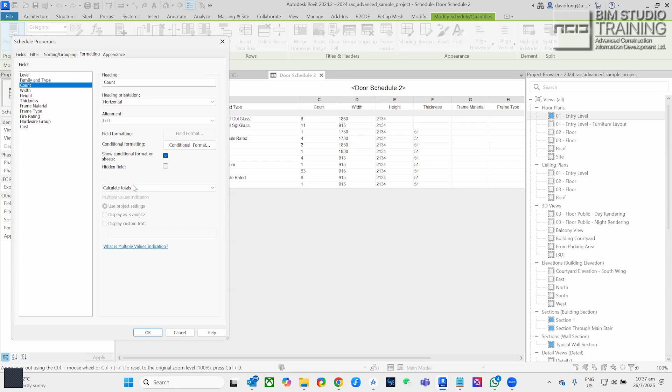So grand total alone is not enough. You go to formatting. This is the one you want: count. At the moment, no calculation. Click on that, calculate total. Calculate total of count, and OK. Well, you've got 100 doors. So 100 doors, you've got so many types, and each type you've got so many. These are the information. Now you have a very clear schedule for your subcontractor.

Why do we still need QS? No need, is it? They don't need to do counting. So you count the volume of concrete, the number of doors, whatever in the model, you can count it automatically. Why still need QS?

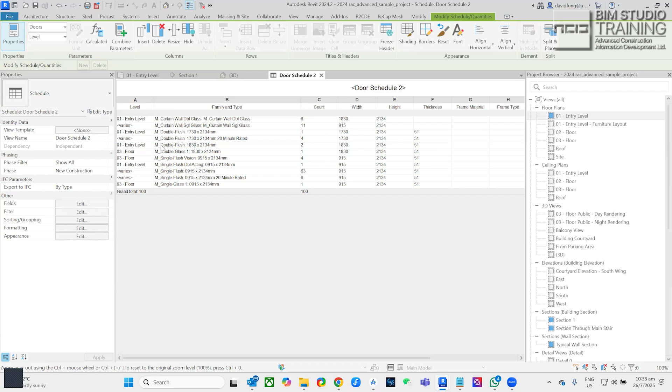Oh, of course, on other aspects, right? On the claims, right? Okay, now we got 100 doors. Look at this. If I go here, I got a floor plan, I got a schedule.

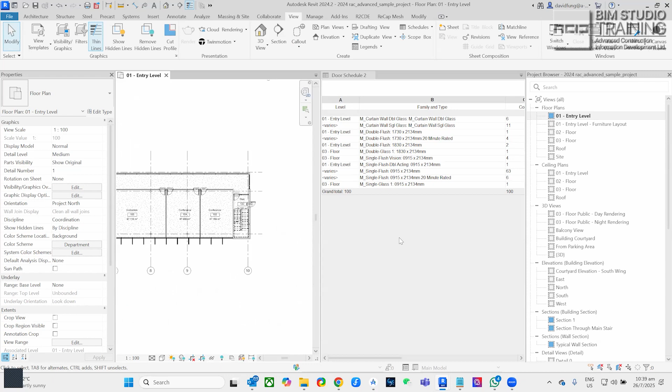Now the schedule, as I said, is another way of looking at the model. It's a table way of looking at the model. They're the same thing. What do I mean by the same thing? Because it's SSOT, single source of truth. That means if I change one thing, the other will change. Now, as I said, I keep on changing. I'm an architect, so I change things.

I don't need this door. I don't need this door. I delete this, and then I add in some more doors. So I want a double door here. I want one here. I'm changing my design.